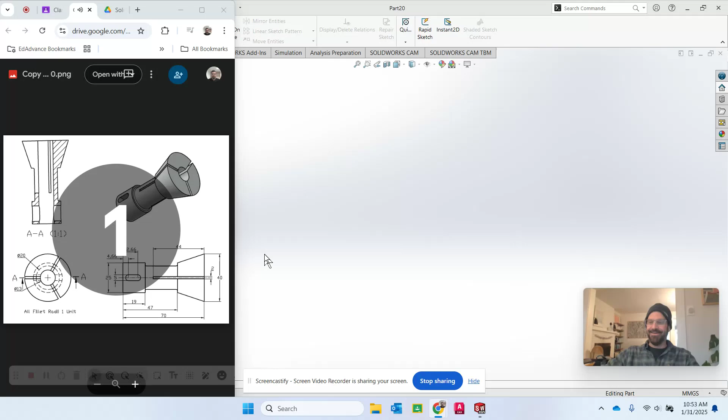We've gone through seven, eight parts already. And everything we've done so far has been built on the same kind of core skills, which are selecting a plane, making a two-dimensional sketch, making sure it's a closed profile, and then extruding that two-dimensional profile into a three-dimensional solid shape within SolidWorks. And we've been building more and more complex shapes, but everything we've done so far, more or less, has been based on that same progression, that same sequence of steps, right?

And it's all based on the idea that you can take a two-dimensional profile and just make it fatter, right? Or make it taller, or extruding basically, which is just kind of like taking one shape and moving it along one axis. So growing it in one axis. But as you know from real life, there's a whole bunch of shapes that don't easily fall into that category. If you think about anything like a baseball bat or a bowl or a pot or a pan or a planter's pot, anything that is based on a cylindrical kind of cross section, they don't always work so easily with just an extrusion.

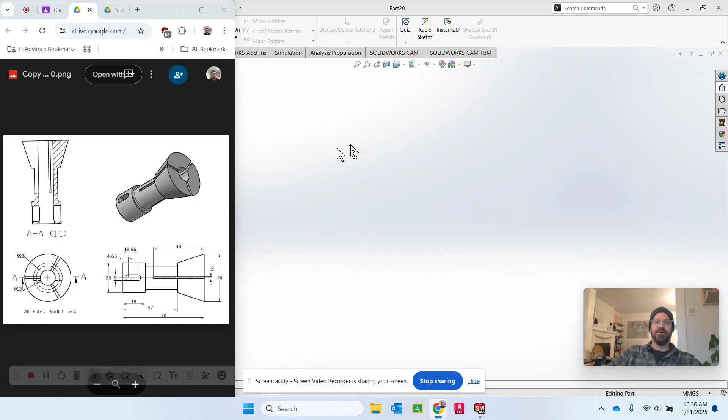So something like this, it's not so easy to do. I mean, you could do it maybe with a workaround with some extrusions and some lofts. Anyway, we're not going to get into that yet. We're going to talk about revolving parts. Right. So I'm over here in SolidWorks, and I'm going to draw on the front plane, make a new sketch, and there's not going to be a lot of dimensioning here. I'm just going to start to make a shape.

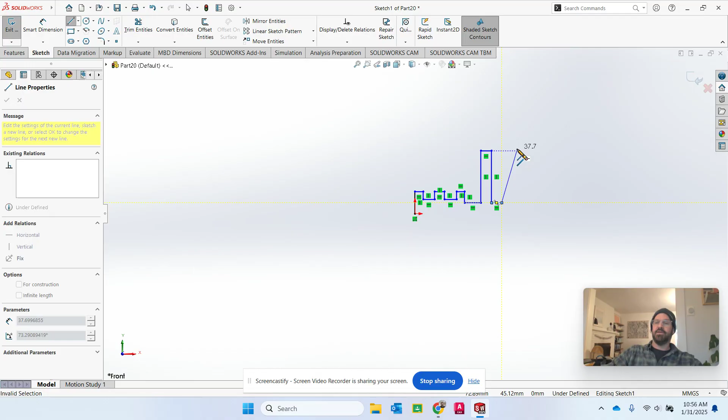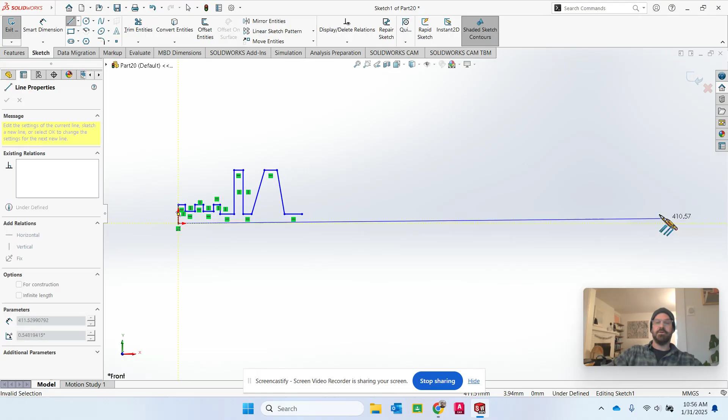I'm just making a shape. Let's go up, over, let's go down, let's go over. Maybe we'll make some other things that look like this. Let's zoom out a little bit. We'll just end it right there. Okay. You know what, let's do this. Let's establish a long straight line. And now let's make a couple of weird shapes here. Let's make like a circle shape and let's trim part of it away.

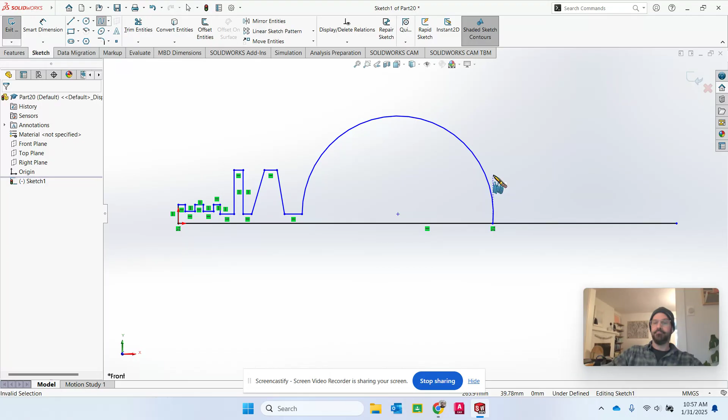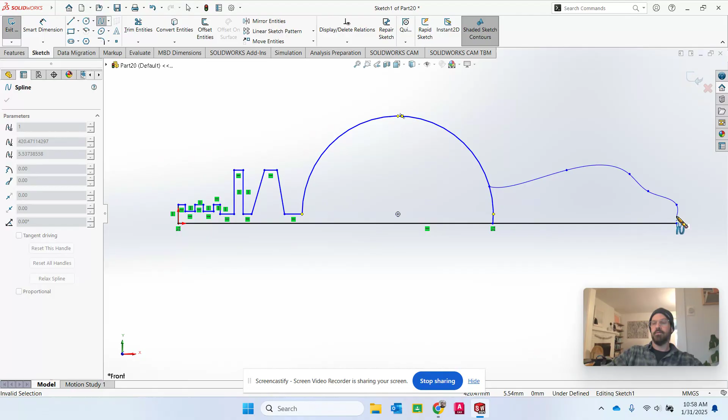Have we played with splines at all? We haven't really played with splines too much. Okay, getting a little crazy here. Let me trim away part of it. Just get rid of that one. Let's see. I'm gonna do that. And let's cut it off right there. Trim away this last little piece here.

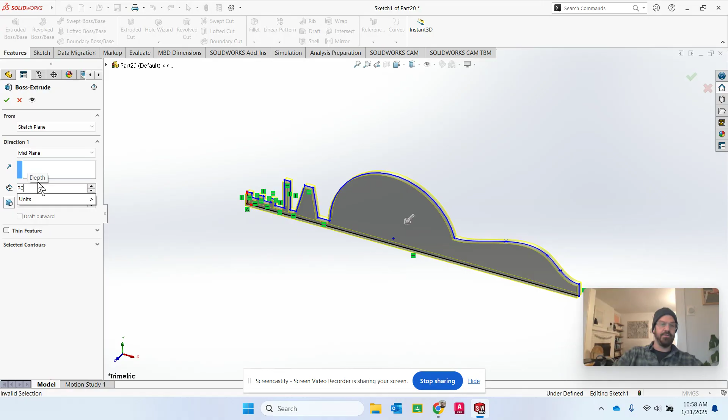Now, when I do that, you see I've created a two-dimensional profile. It's kind of a weird shape, right? Now, if we were in the business of just extruding it, historically we've just done extrude boss base, and it would make it, say, 20, so we can see it a little bit more. We've just been making a shape that looks like that, right? That's not the kind of shape we're talking about right now.

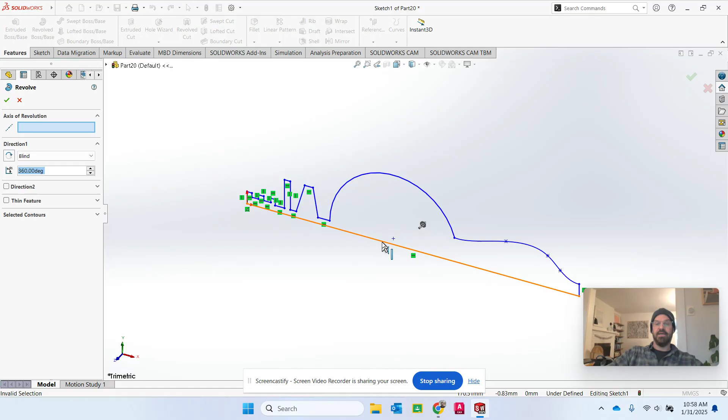Instead, what happens if we want to revolve it around a central axis? So if I click on this, it allows me to say what do I want to revolve it around? And if I click on this, you can see very quickly it takes my shape and revolves it around that central axis that I just set.

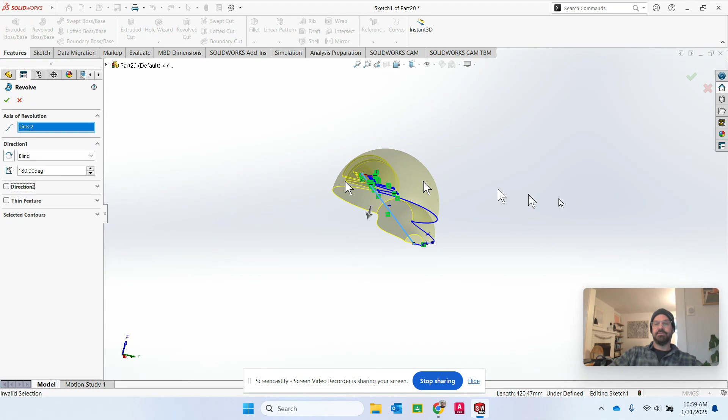Now I can change this. I can make it, instead of going 360 degrees around, I can make it go 120 around. So it's just like a third of the way around, right? Something like that. Or I can make it go 180 degrees around. So it's like, I don't know, a spoon of some kind. I don't know, some kind of weird scientific instrument.

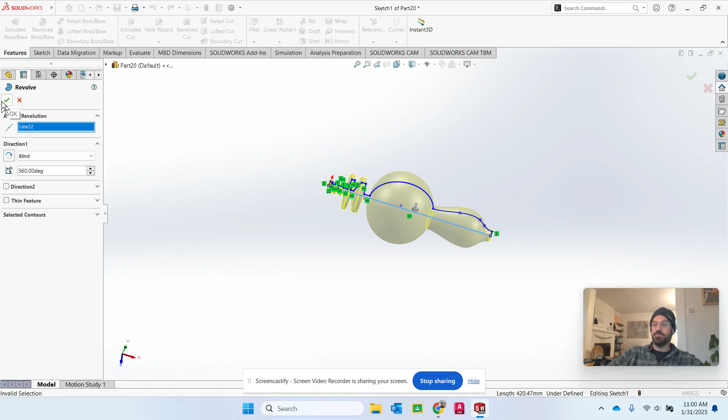But if I want to make it go all the way around, I make it 360 degrees around. So it's a very straightforward way of creating a two-dimensional line, a two-dimensional profile, and just turning it into a three-dimensional solid just by rotating around a central axis. There's a huge variety of things that you can make with that simple technique. Earlier, before I stopped, we did a revolved cut. So this is a revolve boss base to turn a two-dimensional contour into a three-dimensional solid.

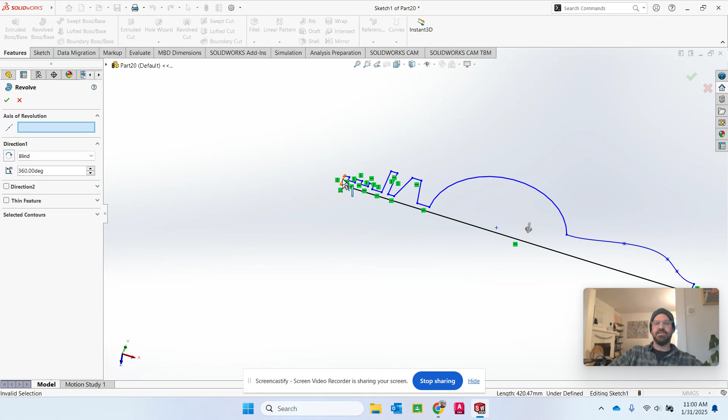I want to show you something though. You've got to be a little bit careful. Sometimes it'll give you an error message. So say I don't want to rotate it around that. I obviously drew the shape to perfectly rotate around that one line. But say I chose something different. Say I chose this one instead, right? It gives me a totally different shape just because I picked a different axis of rotation. Instead of picking that long black line to spin around, I selected that one little tiny line right there and made everything spin around that.

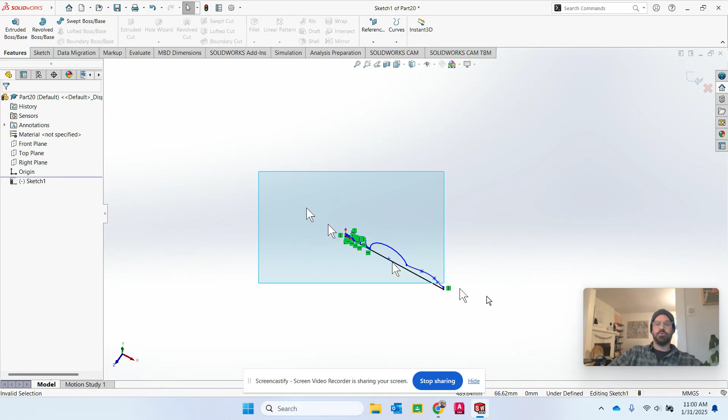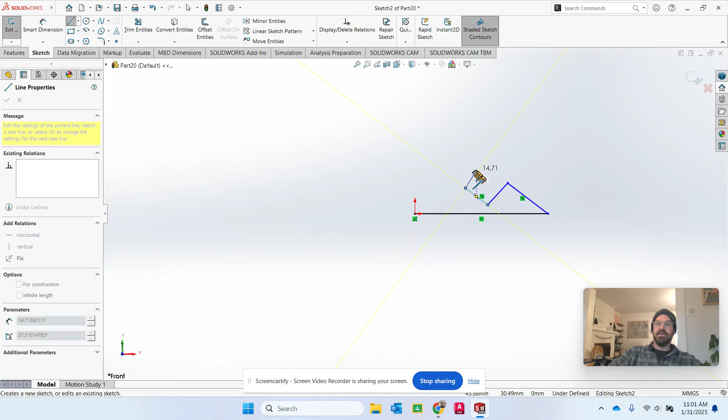Now it might give you an error message. Let me just show you an example of something. Let's just get rid of all this, right? So instead, we're going to draw on the front plane, new sketch. Where did everything go? Okay, there we go. Say I did some shape that looked like this. Let's say that's my starting point, and I go like this, and I go like this. I don't know if that's gonna work or not.

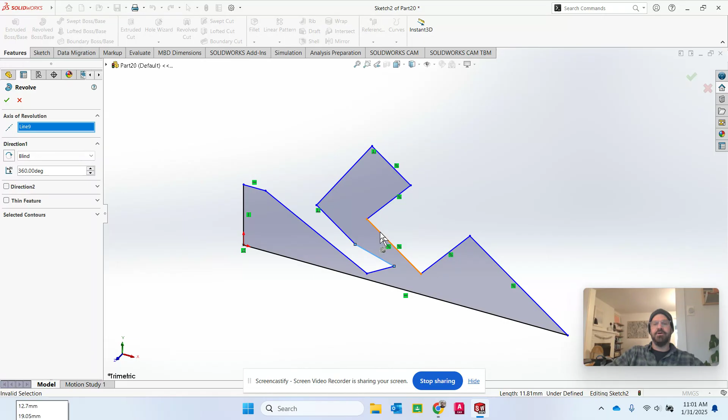What if I took that and did a revolve boss base? Now, if I try to revolve it around this one, does it work or does it not work? That works. Okay, cool. What if I tried to do it around this one? It can't do that, right? It can't do that because if it revolves around that one line, all of those contours, these gray parts here, are gonna run into each other. They're gonna overlap, and then it won't allow you to do it. So there are only certain patterns of revolving where it will allow it to work.

And sometimes when you try to make it work, you might realize that you've got some overlapping three-dimensional solids that would be created if you rotated your 2D contour around that axis of rotation. So sometimes it's going to act in a way that you're not totally expecting, and you need to think very carefully about what is the right axis, and whether any of the gray parts are going to overlap if you rotated around that axis. So you might need to just be very careful about how you do it.

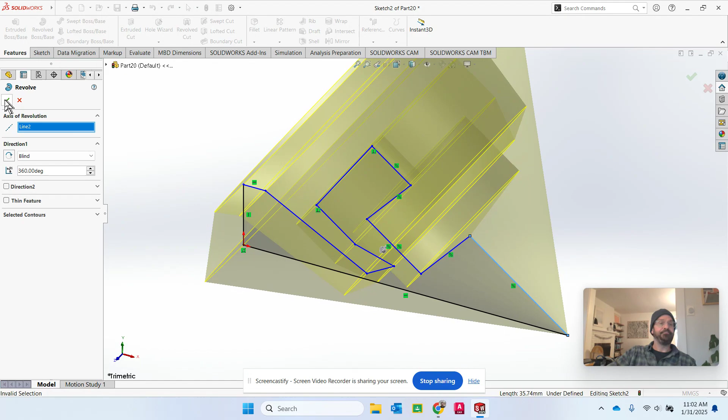But anyway, you can make some super cool shapes just by revolving a simple 2D line around an axis of rotation. So that is the Revolved Boss/Base tool, and it's going to be useful for a number of things. Look how cool that is. It's a simple little shape, pretty darn cool. You're going to be using that on a number of assignments going forward, so get used to it. If you want to cut something out, you can use a revolved cut as well. It does a similar kind of thing, but instead of building up a shape, it cuts out a shape.

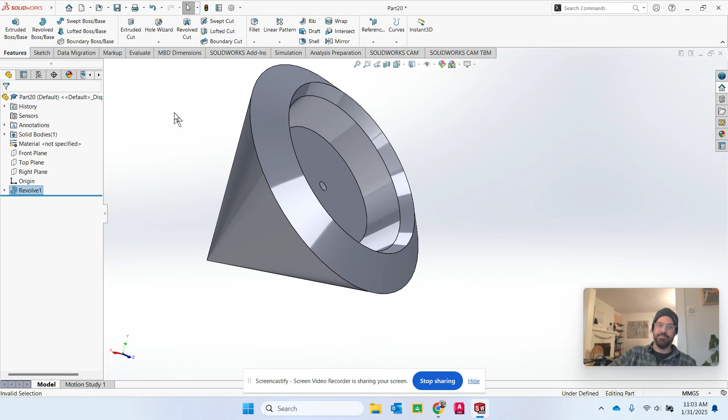So that's it for this video. I hope you found it useful, and I hope you will use it when you complete the next assignment, part number 9.